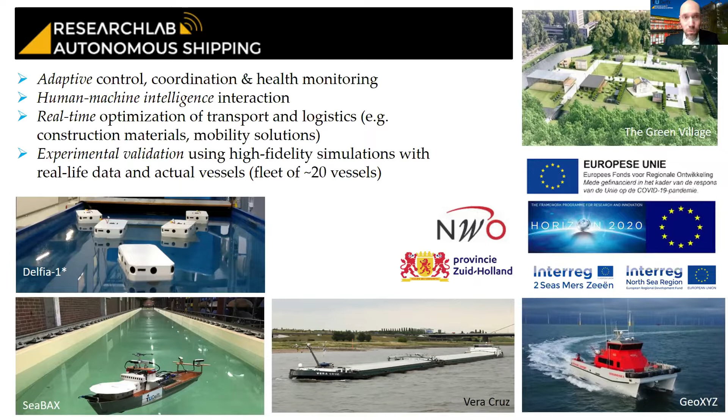As you can see here on the slide, a lot of the research is funded by national or European funding agencies, with which we work together with academic partners as well as industrial partners to solve future mobility and transport over water challenges. We take a multidisciplinary approach that enables green and autonomous waterborne transport, not only on the open oceans, where often you have a lot of space, but the conditions can be quite wild with storms and highly fluctuating water levels and waves.

We also look at crowded port areas, inland waterways, as well as metropolitan and urban areas. In each of these different domains, we ask ourselves the question: how can we use sensing, communication, control and actuation technology to improve the operations, possibly by removing the role of the human operator or moving it onshore or into a control station.

We adopt a multidisciplinary approach in the sense that it's not only about technology and marine engineering, but it's also about regulations, about business models, about embedding in logistics, ethical questions, as well as human factors and training.

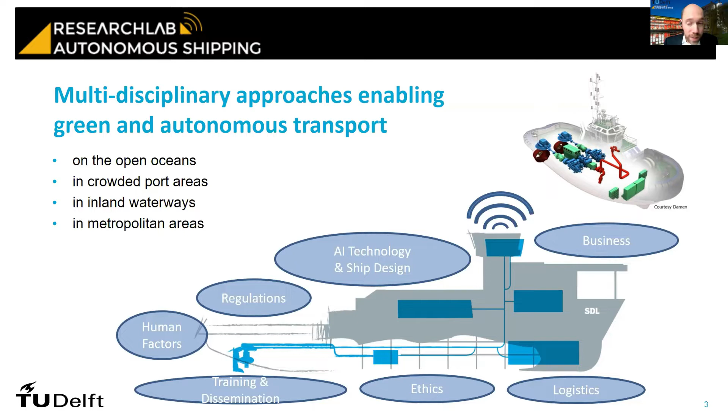Starting from the individual single autonomous vessel, there are quite a lot of groups worldwide and projects working on autonomizing, making smarter individual vessels. We are also working on that in the research lab, in particular focusing on new technology for machine vision and situational awareness, predictive control methods for maneuvering control, as well as predictive control methods for thrust allocation and energy management.

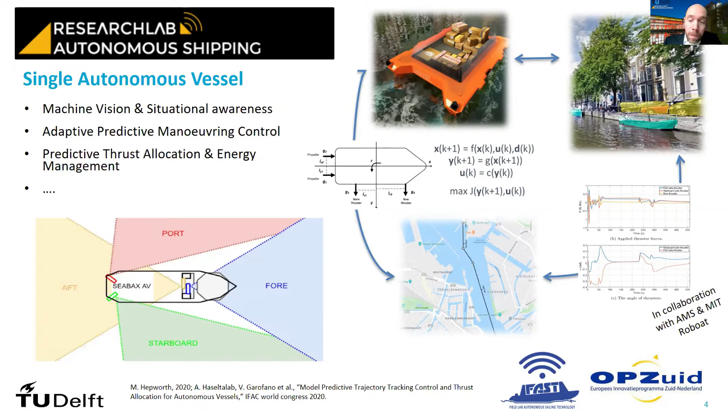Here you see some nice work that we did together with MIT and AMS in the Roboat project, relating to autonomous shipping inside the metropolitan area of Amsterdam as an example. But this is about the individual autonomous vessel. Where it becomes really fascinating from our point of view is if you zoom out a little bit and look at the autonomous vessel in relation to its context, where you see a lot of other traffic.

So instead of only focusing on advancing the state-of-the-art on autonomous vessels, we in particular focus on multi-vessel interactions, and how to design these interactions at the operational level.

What if ships could talk? If they could exchange information more than they are doing now, could they, for example, share in real time, in an iterative way, the different paths they are planning to take? These paths may have been optimized locally, taking into account energy, emission sustainability, as well as logistical efficiency goals, while also choosing paths so they don't collide with each other.

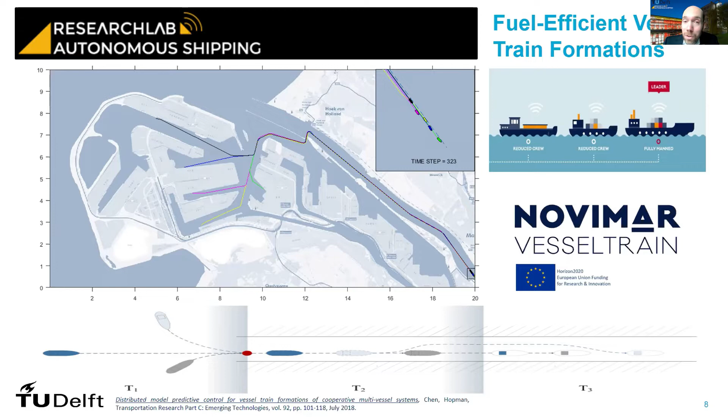So the NoviMar project has investigated different concepts, also looking at this from the business perspective. Here it's about interaction between ships that are not physically coupled.

But what if we're looking at object manipulation on the waterways? We have a large object, like a container ship, that needs to be manipulated by multiple tugs. This is very difficult to do, especially when approaching the port area and the terminals where there's a lot of other traffic.

We are developing methods that look at how to optimize the movements of the tugs, how to exchange information between the tugs and the object being manipulated, such that the whole constellation, as a multi-vessel system, moves most effectively from its origin to its destination position, taking into account dynamic obstacles as shown in the animation, as well as unknown disturbances due to changing currents, waves, winds, etc.

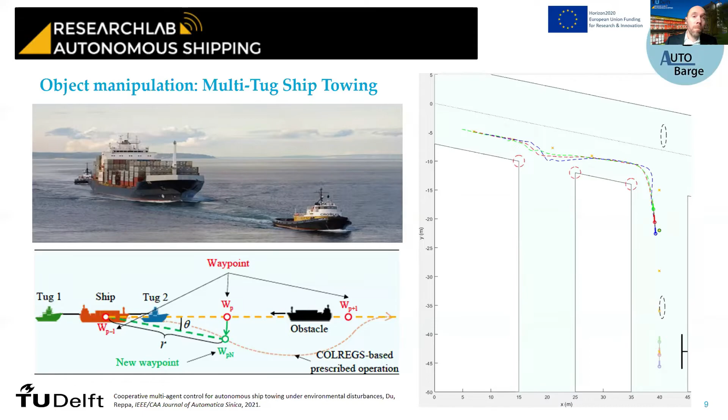Then zooming out a little bit, not only focusing on individual ships and their direct neighboring ships, what if we look at the port area? That is also the central area of studies in the Moses project.

What is the role of the humans going to be? Will the ships be controlled by a captain that is basically just put on shore? Or will this become a kind of supervisor overviewing the movements of a lot of ships, only interacting when there's really a need or when a dangerous situation emerges?

What about the interaction with other pieces of equipment, like cranes and AGV systems? Are these human operated, or will they also be replaced at some point for efficiency reasons by automatic systems? And how will these interact?

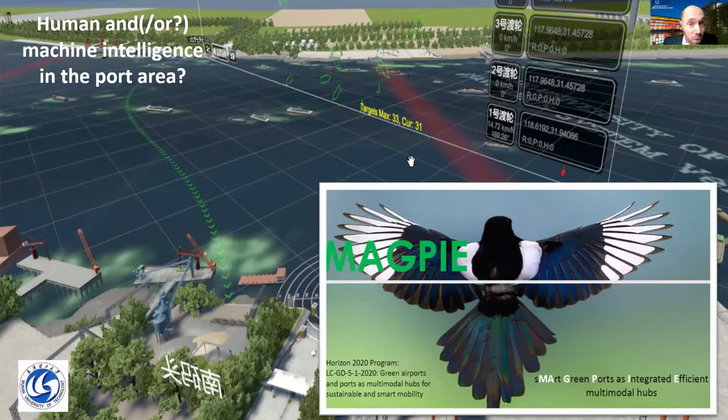We've been studying this together with international partners, and the recently started H2020 program MAGPIE really focuses on different aspects of port areas and the introduction of all kinds of autonomous systems and their interactions.

Now, zooming out a little bit and putting things in perspective, because it's not only about making things autonomous. In the end, what we think is important is to improve the way goods are transported. So we look at autonomy over water in function of a smart logistics setting.

In the NOVIMOVE European project, we work on smart and sustainable waterways with the goal to make better use of the capacity of inland fleet and infrastructure, ultimately increasing inland waterborne transport reliability and competitiveness.

We work at this at different levels, starting from new designs of climate resilient ship concepts, meaning they can better adapt their own shape to fluctuating water levels. If you look at the main waterborne corridors in Europe, water levels can vary quite a bit: very low, very high, fast or slow currents. You would like ship designs that can adapt to this such that capacity doesn't drop too much depending on waterway situations.

On board these new climate resilient ship concepts, we also include new smart navigation systems based on concepts from autonomy, inspired by other projects, and also adding the new Galileo network, a satellite system empowered positioning system.

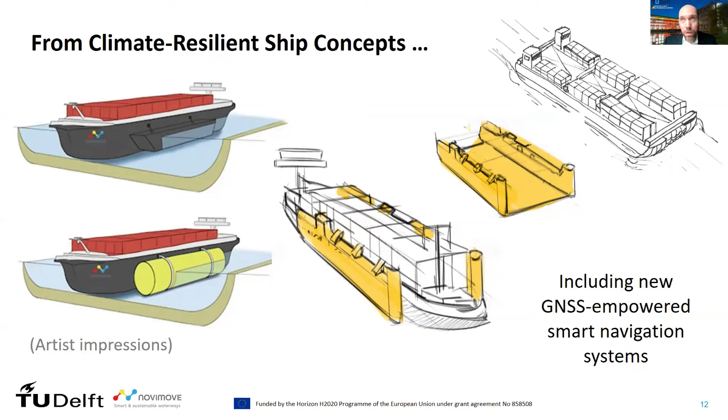Moving a little outside the scope of ships, we also look in NOVIMOVE at new terminal concepts and cargo reconstruction concepts. A lot of the cargo transported in containers is not transported very efficiently, in the sense that the loading or filling rate of these containers is not always 100%. In what situations can you repack containers, and how do you include this in existing warehouses and terminals, and when do you unpack these again? This is part of the new NOVIMOVE terminal concepts.

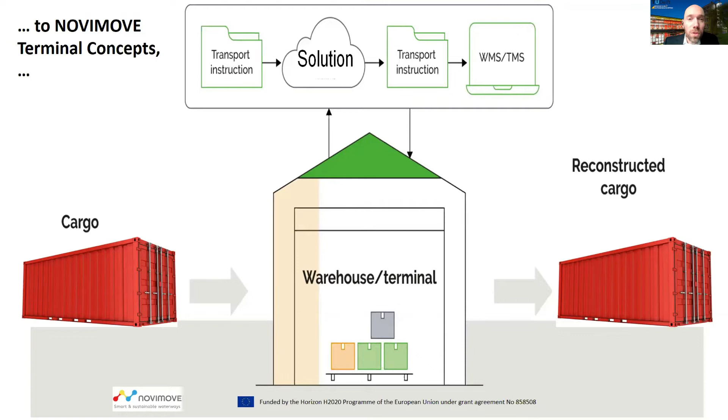Having new ship concepts and new terminal concepts, we also look at the interaction between ship and terminal when it's about floating mobile terminals. When should a ship arrive at this floating terminal? How should this floating terminal unload the ship and reload other shuttle barges moving towards the traditional fixed location terminals?

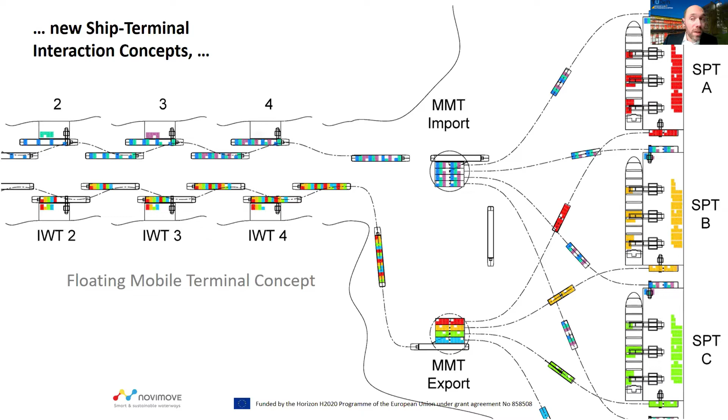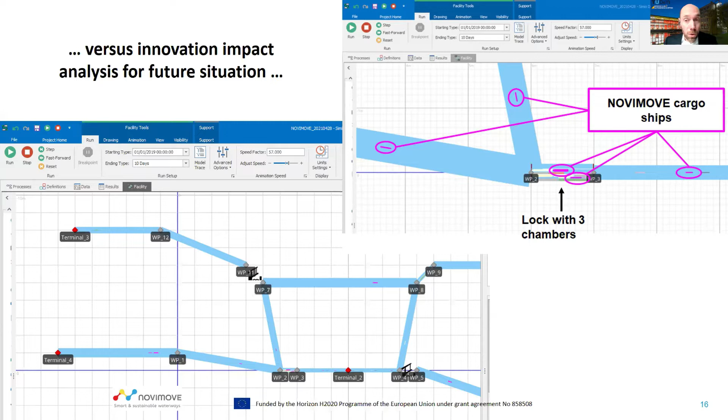To move from concept and innovation towards future implementation, we focus on the Rhine-Alpine corridor, with which the 22 partners involved in this project have a good relation. It's a very interesting system because it's large and very complex, with a high number of ports and terminals. It spans across 5 countries, 3 different transport modes (barge, truck, railway), many operators with different objectives, and numerous skippers exhibiting different behavior, all interacting. Moving from innovation and concept, which we show the impact of in our analysis tools, towards implementation really requires the multidisciplinary approach I mentioned in the beginning, to move from science towards application.

This is only a 15-minute talk, which is very short to give you all the details. So I would recommend, if you're interested in these topics, take a look at this position paper on smart ships and the changing maritime ecosystem. It mentions several of the topics I've talked about today, as well as a recent position paper on AI in the maritime sector, which highlights the main directions the Dutch maritime industry foresees in the future and the role AI has in this.

Besides this, there are also 2 books I'd like to bring to your attention: one on distributed model predictive control, which encapsulates this idea of ships talking to each other, exchanging their plans and autonomously adapting to find consensus, and a nice book covering the latest insights on transport of water versus transport over water.

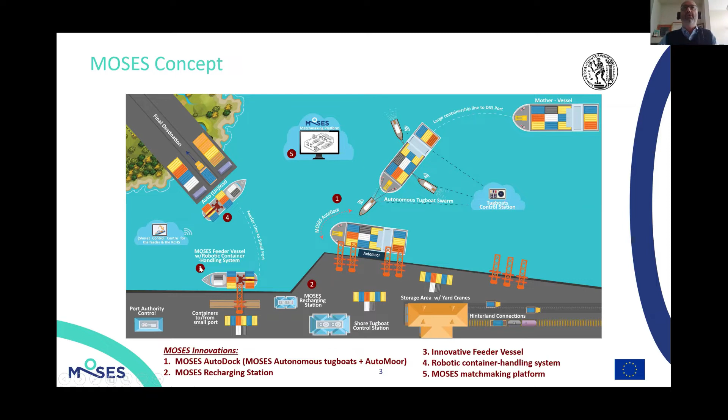Now our partner from Core, Stefanos, will be discussing the autonomous tugs and the architecture and the way that we see that. On top of that, we also have a control station, a shore control station that handles part of the overall operation, meaning the tugs and the autodock, whereas there is another control station that handles the various activities of the vessel.

So here are once more these innovations and the various parts and bits. The thing is that we had to be able to serve with this innovative feeder vessel a port that has limited or no infrastructure at all, and this was one of the challenging points. Another challenging point is, as I've already explained, we do not want to change anything in the day-to-day operation of big vessels.

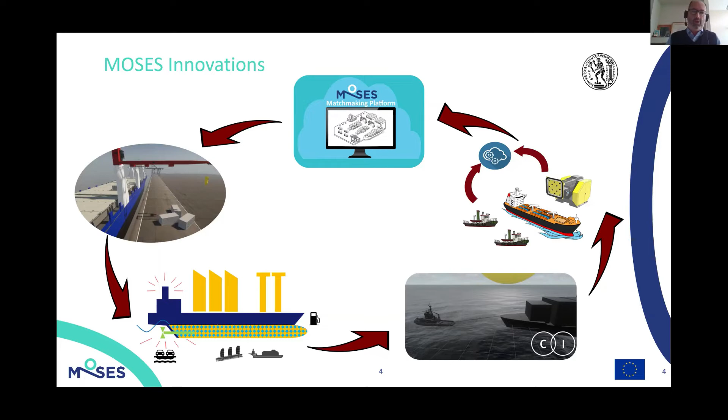Picking it up from one of the points mentioned by Rudy, for example for the interaction between tugboats and the vessel, we have made the complete function mapping of the functions, and we are now deciding which of these will be replaced from a human-based to a more autonomous-based operation. This is very, very interesting work.

The objectives, as you can see, can be technical, societal, and also market-oriented. And of course, all of that puts together an overall picture of environmental and reduced footprint. So here you can see some hand-picked objectives.

We want to develop an automated maneuvering and docking system for deep sea ports, develop and promote the matchmaking platform exactly to boost the potential and operation of short sea shipping, and design an innovative hybrid electrical feeder vessel outfitted with a robotic container handling system.

And we want to reduce the environmental footprint for short sea shipping and ports and improve efficiency, and at the very end, the end-to-end delivery times, exactly to boost the short sea shipping mode.

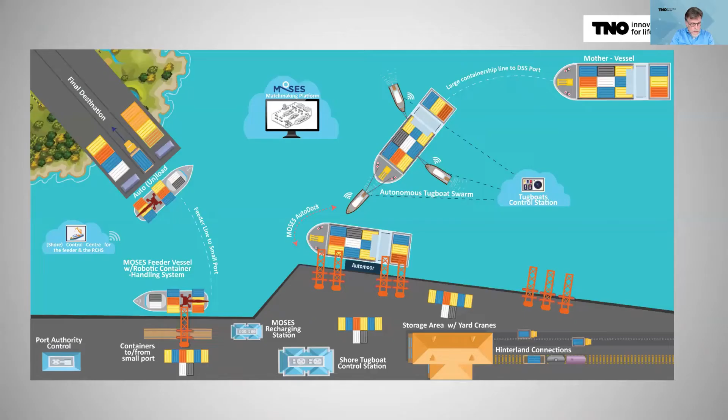The robotic container handling system we are developing, and will eventually demonstrate, will be mounted upon the innovative hybrid electric feeder vessel for the short sea shipping leg. We do this in collaboration with MacGregor, the consortium partner who also provides the crane system.

The main feature of the MOSES robotic container handling system is that it provides an autonomous loading and unloading service to the feeder vessel. In other words, it does not need an on-site or onboard crane driver, deckhands, a stevedore, nor a safety officer. This makes the robotic crane a key innovation for enabling a short sea container supply chain independent from the infrastructure of small ports.

That's very important because all it needs is a quay for berthing.

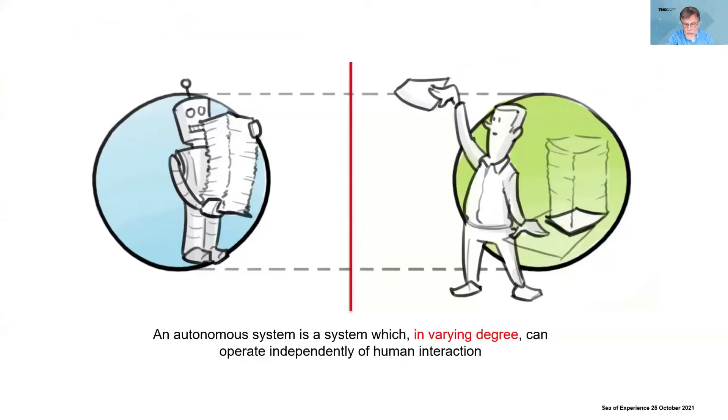Although robotic systems will be designed to operate autonomously, their self-sufficiency will not be 100%. That means there will always be situations in which human interaction is needed - for instance, when it is unsafe to operate because people or trucks are in the operational area, or when an expected container is not there. In these situations, human intervention is needed.

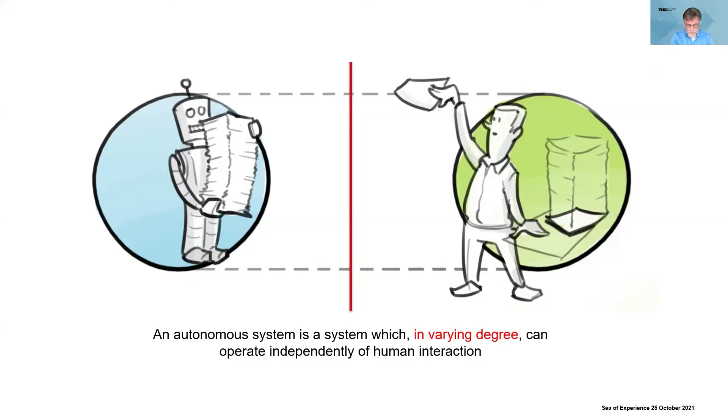As a consequence, robotic crane operations will be supervised from within a shore control center located at a distant site. Remote operators supervising the operations are only involved when problems do occur. This means the operators are not the replacement of the remote crane driver nor the safety officer - these functions are performed automatically by the robotic crane.

Despite this exciting technology, in this presentation I will focus on remote operators.

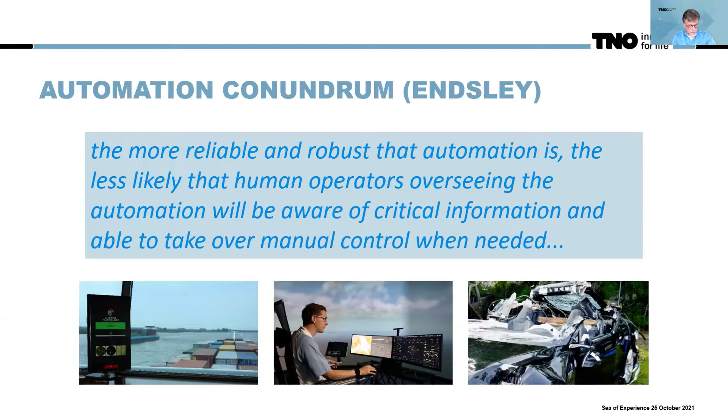In addition, in the Shore Control Center concept, it is efficient that several remote operators will be responsible for multiple loading and offloading operations. So keeping track of critical information and overseeing all operations becomes increasingly difficult.

To overcome this problem, an artificial intelligence operator support system is being developed. An intelligent operator support system, abbreviated as IOSS, is a system that supports remote operators in their supervision and control of multiple robotic container loading and unloading operations.

One of the foreseen functions of IOSS is to manage the Shore Control Center by assigning the right operations to the right operator. We do this by planning operations continuously based on operation difficulty, operator experience, and operator workloads.

This means that if a new operation is registered, it will trigger an allocation process where one looks at which operator has the skills and the time to take on the operation. In addition, operators can disagree with this allocation and flag an operation for rescheduling, triggering the allocation process again. If an operation is reallocated multiple times and nobody takes it on, it is put to review by the human team lead.

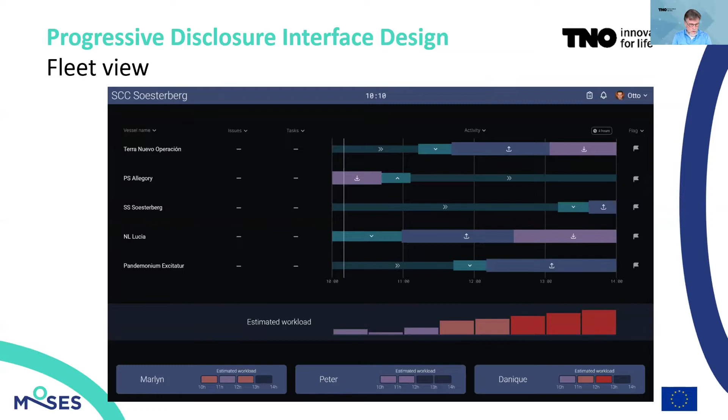So this is the view of the operator on fleet level. This is the fleet view, and the journey status of five imaginary ships are projected. This indicates that a ship is in transit. This indicates that the ship is berthing. This indicates an offloading operation, and this is a loading operation.

And here below you see the estimated workload of, in this case, Otto, the operator in charge. When multiple loading and offloading operations occur simultaneously, the workload of the operator becomes the highest. And when the workload gets too high, for instance when an unexpected problem occurs, ships can be reallocated to other operators depicted below.

And here you see the other operators and their attached workloads.

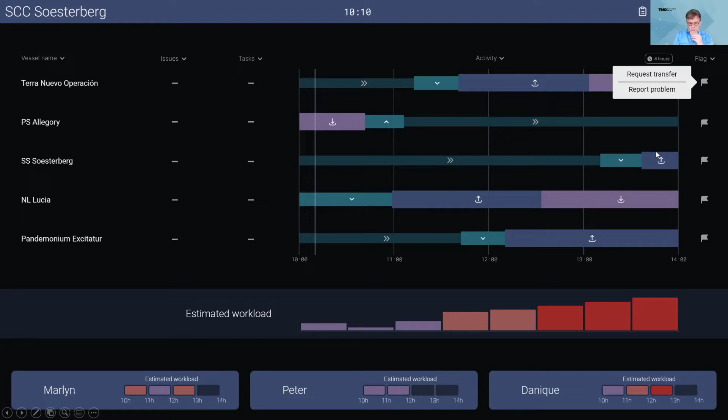And this is an example of flagging a problem or requesting a transfer of the vessel. When the operator thinks he can't handle the situation, he can transfer the ship to another operator.

So from within this ship view, the operator can switch back to the fleet level view, but also can switch to the immersive view. So let's do that.

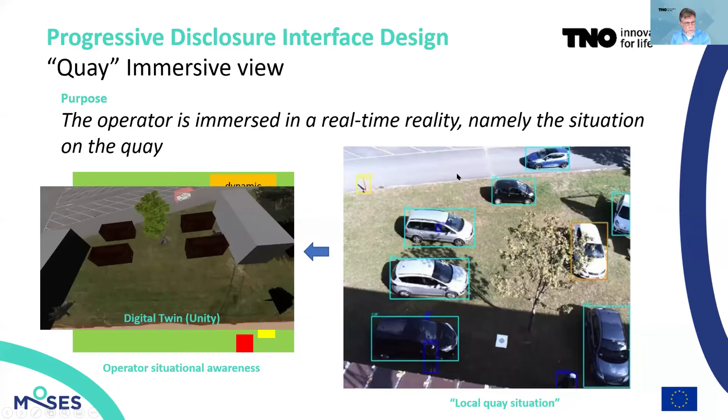What we want to do initially, what we strive for in the end, is to create a digital model, a digital twin as you like, of the local environment, in which the dynamic elements, like the containers and other dynamic objects, can be projected. So the structural elements are fixed, but the dynamic elements can be inserted, as it were.

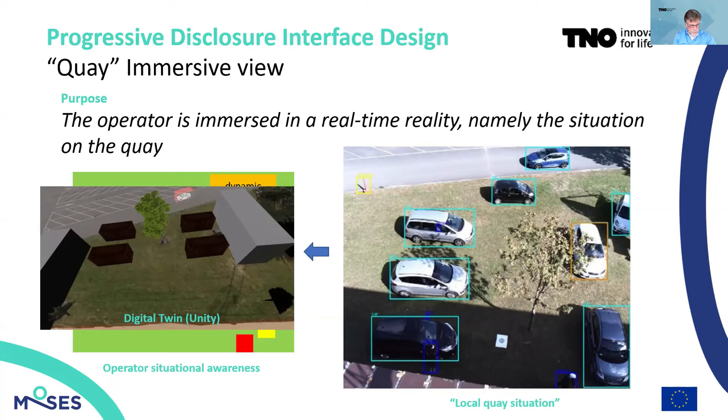So we currently are preparing a large experiment to find out to what extent subjects can build up situational awareness based on the 3D model compared to the real world feed.

And here you see an example of a task a subject needs to complete, and of course the same task needs to be executed also with the digital twin. So taken all together, it means that we eventually need to create 3D models of the loading and offloading area of the individual local ports. And the one at the left is a simple model of the Mykonos quay.

We are particularly interested in the stretch of quay on which the containers will be placed. Here you also see a static element where the containers would be projected. So this would be the area where the containers could be projected. And here you can see cars passing by or people walking around. So that's the basic idea.

So we write the local quay situation that will be projected in the 3D operational model. What is the immersive view of the operator?

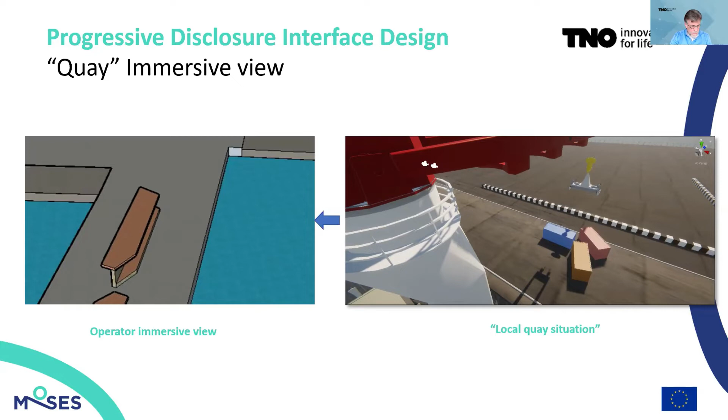So I think this is it for now, because I only had 15 minutes. We hope to provide you a final demonstration of the intelligence operator support next year, and I hope we can show you more work in progress next year. So that's it for me.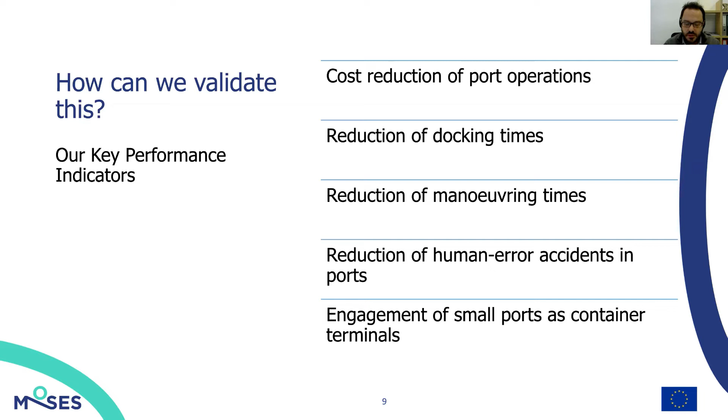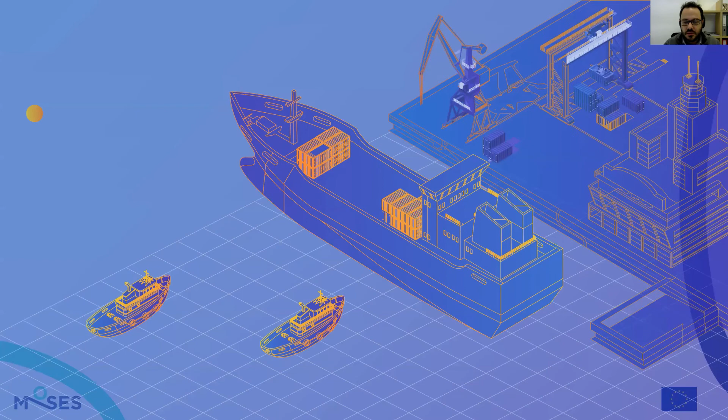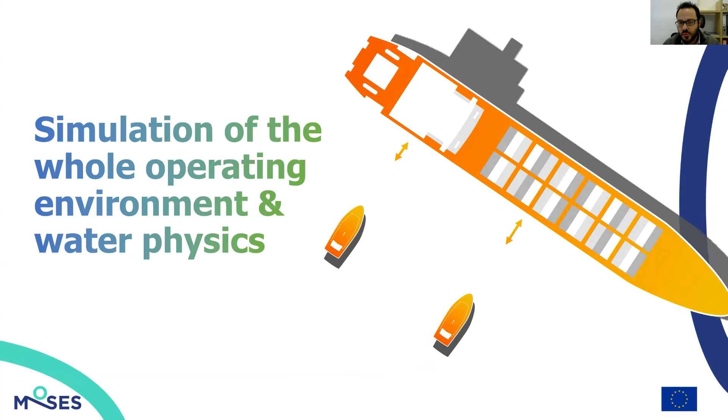So what we're doing in order to succeed in this is we are using a set of enabling technologies. One of them is a state-of-the-art simulation environment that we are building from scratch in the Unity 3D system, which is basically a graphics engine used in the gaming industry. There we are modeling the whole operating environment of the port, including water physics, as the water and environment mostly affect the movement of the boats.

We're doing this, of course, with our partners in the project. Here you can see an example of the port of Piraeus and how we're building, using several technologies, a virtual port environment, including examples of a virtual tugboat and a virtual container ship.

Why are we doing this? We consider that this simulation environment is a virtual space that enables us to test and demonstrate the operations of these autonomous tugboats. And in order to do that, we need to embed into these ships the intelligence to operate on their own and also to communicate with each other.

Of course, there has been a lot of work done both in hardware and software, the analysis and architecture of the system. But as a core innovation, we are also working on this swarm intelligence system.

So for this, we are using reinforcement learning algorithms, which is a machine learning training method based on a rewarding system for the operating agents. Basically, we let the tugboats act on their own, and then we give them rewards when they are doing things correctly.

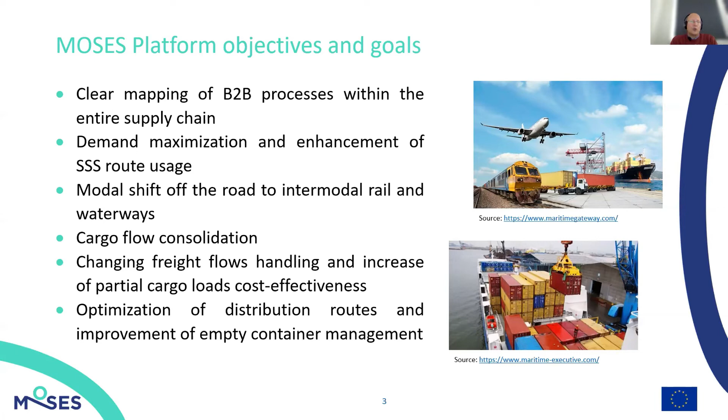This way, we will also optimize the distribution routes, and we will improve the empty container management, which we know is a major pain point for most logistic operators, that they have to move around empty containers, thus creating not only unnecessary traffic, but also greenhouse emissions that are of no use actually because no freight is transported.

The platform audiences, the users that we have for our platform, are the shipping agents, the terminal operators, the freight forwarders, the shippers, the trucking companies, and the rail operators - practically any provider and any user of logistics services. The main tasks that they will be able to perform by using the Moses Matchmaking Logistics Platform...

...is going to be to have a list of all the ship and rail routes that are available in order to schedule their transport, to be able to post their own needs so that they can be covered by a transport mode operator.

They can place order requests in case there is no available route on the current matchmaking platform, and these can be replied to by providing this route from a transport operator.

There will be information about possible matchmaking options in terms of cooperating with other logistic service users in case we have partial loads on either vessels, rails, or even trucks, and be able to proceed with order execution and status monitoring of their order.

Overall, this logistics platform has as a main goal to provide the means of communication between different stakeholders of the logistics services sector in order to achieve as much cooperation among them as possible.